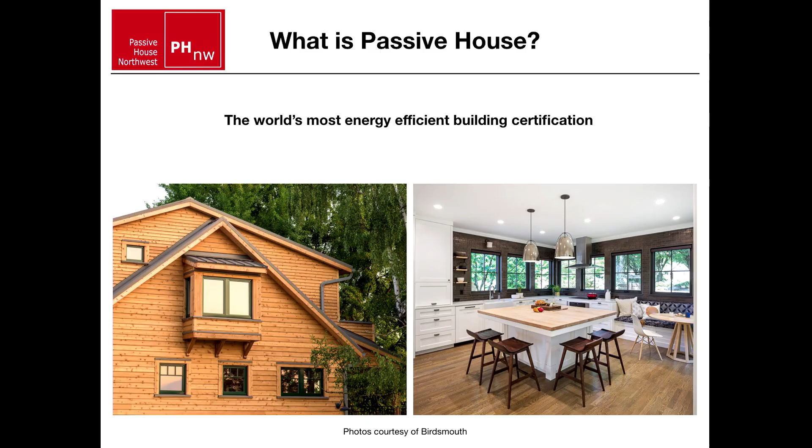And so we are looking at a couple of projects that were completed that we'll be getting into the details during this presentation of some of the things that we're looking for in Passive House. But for now, we're just going to run through a few slides basically describing what Passive House is.

So one of the most key points to bring up about Passive House is that it's performance-based, not prescriptive. So many of you are probably familiar with prescriptive certifications such as LEED, where maybe you need to hit a certain number of points in order to receive your certification. But because Passive House is performance-based, we're actually looking at the performance of the house.

For number one, the project has to be modeled before it is built. One thing I want to mention before I get too far down this road is that the name Passive House is a little bit of a misnomer. Really, you can do any type of building, whether it be commercial, residential, private sector, public sector, anything can fit in the name. But the main point is that it needs to be computer modeled and actually show results in order to be certified.

We've got a little video here for you that does a really nice job of describing what Passive House is: Passive House explained in 90 seconds.

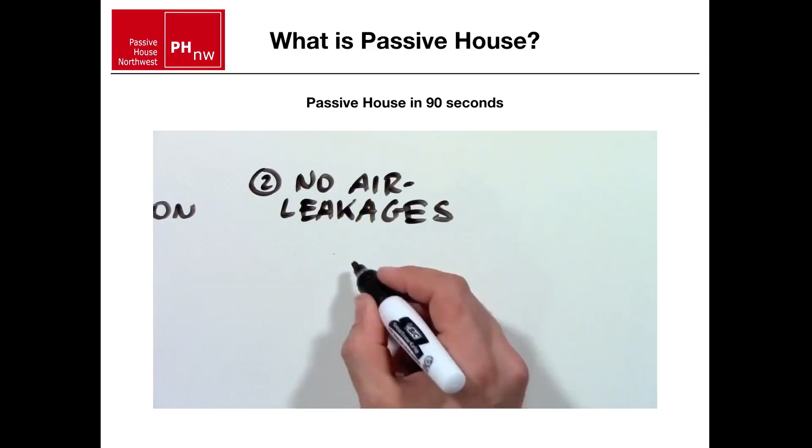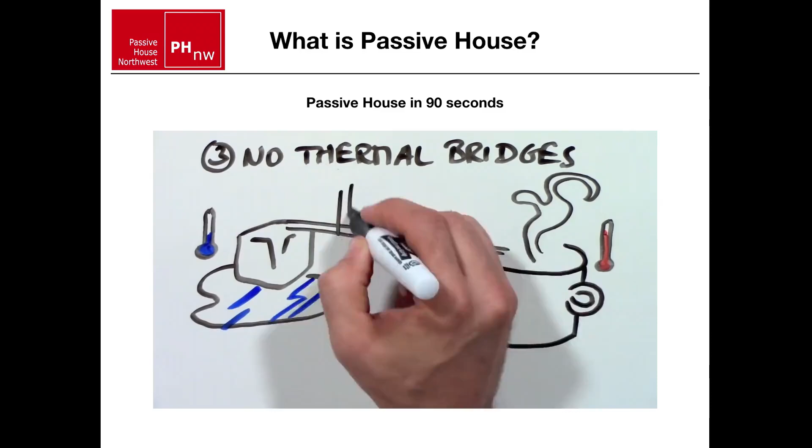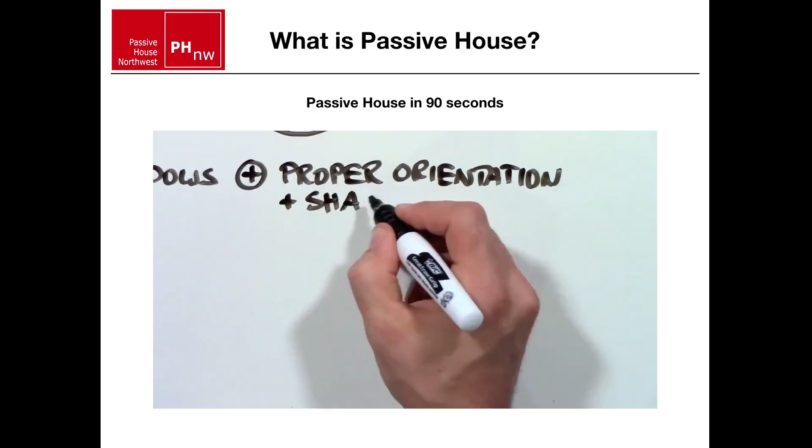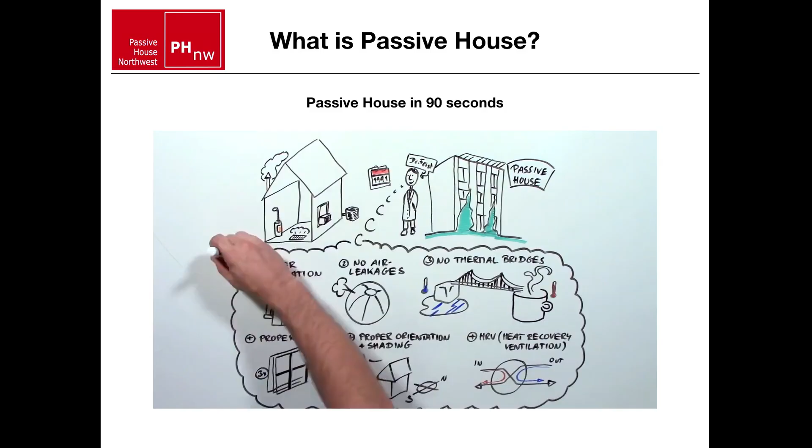Does your house have a heater in the basement or maybe a fireplace? Probably also a central air conditioner or maybe a window unit. Did you ever wonder if it was necessary? In 1991, a physicist in Germany, Dr. Feist, built the first passive house. Here's what he did. One, proper insulation—it's just like wearing the right winter jacket, it also doesn't need a heater. Two, no air leakages—there should be no holes, small or large, to let hot air out of the house. Three, no thermal bridges—a thermal bridge is like a road for heating energy in which warmth can travel right through your walls. As a matter of fact, most of our houses have thermal highways in our walls where heat can easily travel to the outside. Plus, the house needs proper windows, most of the time with triple pane glass. It needs to be oriented properly so the sun can heat it in the winter and shade is provided in the summer. And it uses an HRV, a device that provides the inside with fresh air without letting the heat out. Add all these things up, and it turns out your house doesn't need a heater or air conditioner.

So where does the heat come from? A passive house needs 90% less energy, and that can easily be supplied by your body heat, the sun, your appliances, light bulbs, and even your TV. This saves you a lot of money on your heating bill and helps preserve the environment.

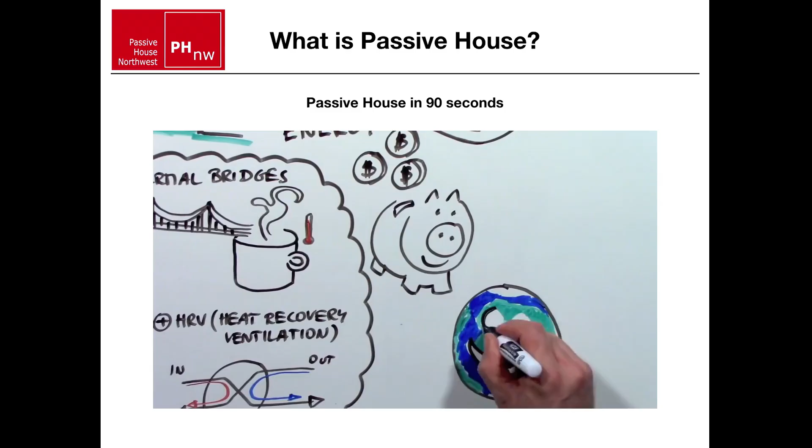Did we make it in 90 seconds? You bet we did. Okay, great.

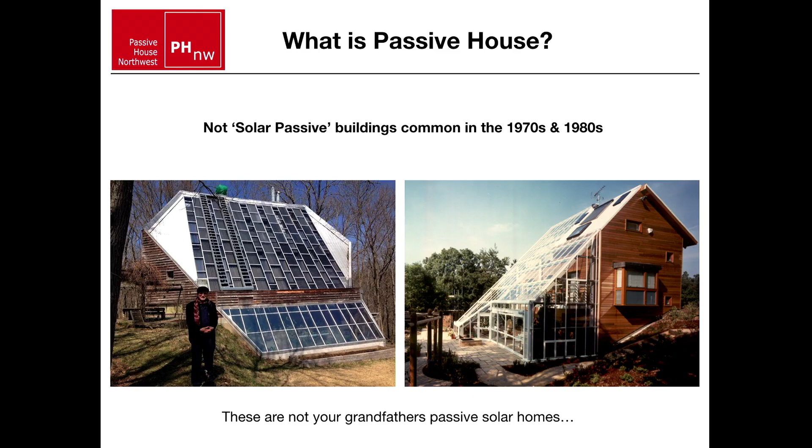Regardless, we can work with any building vernacular that's popular today. We don't need to guess at the performance of a building. Everything is computer modeled ahead of time and energy modeled, and therefore we know, within a good degree of certainty, how the building is going to perform once it's constructed.

And now we're jumping to you. Yeah? I think so. Okay, great. Thank you, Beth, for that. We're just going to be switching off back and forth every so often on this.

But nevertheless, if we're really trying to make a difference in our fight against climate change, buildings are probably the biggest emitter of greenhouse gas emissions. So Passive House is one of the best ways to reduce the amount of greenhouse gas emissions in our buildings through the use of the envelope.

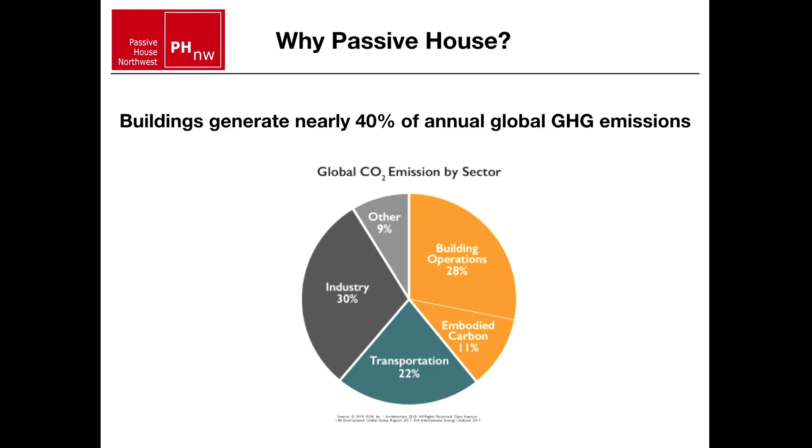So this is kind of a dual-prong approach between addressing the existing built environment—Passive House can be used in retrofits addressing the built environment—but it's also about new building. So I think they're equally important.

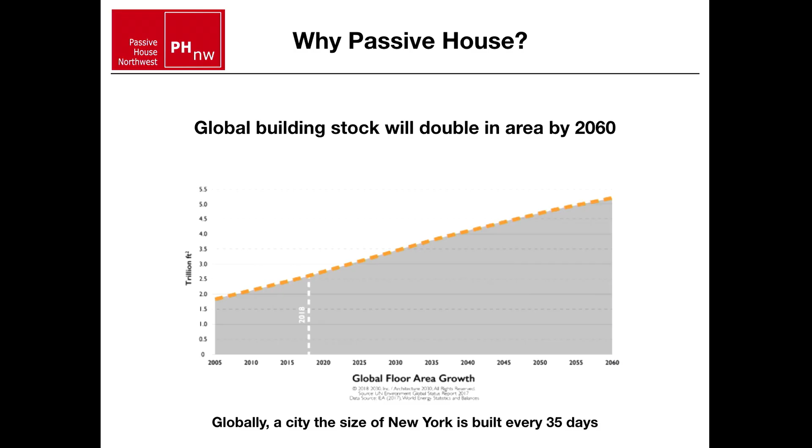As you can see from this graph here, by 2060, if you follow that line over, we're actually going to double. At the bottom there, you can see that remarkable sentence that says a city the size of New York is being built every 35 days on planet Earth. So I think it's imperative that we start making our buildings more efficient, and Passive House is probably the best way to deal with the energy usage in buildings. So this is why we're doing what we're doing and why it's so important.

It might have issues with mold and poor indoor air quality. Passive House not only reduces the amount of energy needed through reductions of the energy usage by the envelope, but it also has all these kind of win-win-win things that come out of it, such as a much higher indoor air quality inside the building.

We'll get into that later on in the presentation. It's much more comfortable, it's not going to be drafty, it's not going to be cold. The back bedroom of the house isn't going to be freezing, whereas the living room has got the ducted forced air heat coming at you and you're too hot there. So not only are we creating buildings that are using less energy, but they're also more comfortable, healthier, last longer, more durable, and also more resilient. So it really is a win-win-win that comes out of this.

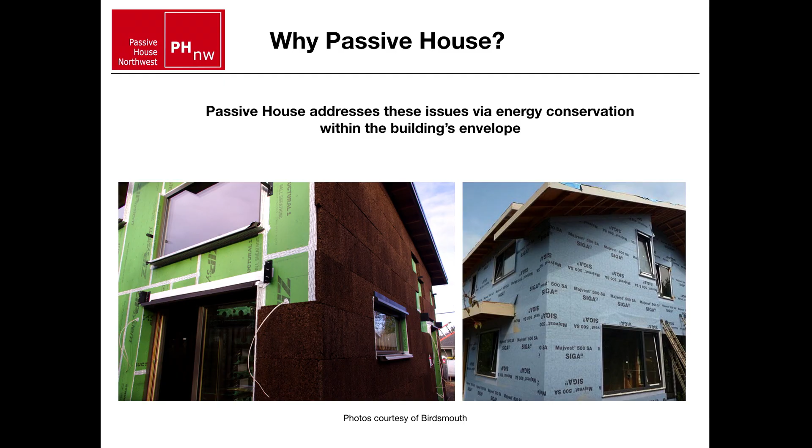The building on the left is something that our company built a few years back, where we used cork insulation on a certified Passive House, and that's kind of the sweater that you're wearing over that building. If you think of the thing on the right as your air barrier being kind of like the parka, that windbreaker that you're wearing, and the one on the left as being kind of a sweater - if you're wearing just a sweater, you get that cold air still hitting you, but if you wear a sweater with a parka over the top of it and you break the wind, suddenly it's really comfortable. Same goes with our buildings, and that's kind of what this is showing.

So I kind of touched on this before - I guess I was getting ahead of myself, but it is a win-win situation. They are more comfortable, they are quiet, which is really an interesting thing. Just a couple days ago I was in a building where we were playing with the windows, and it was a leaf blower outside or something loud - I forget exactly what it was, but you could open and close the window and see how quiet it is, which is really remarkable.

Another interesting story - I was sitting on a panel once a few years back with a woman who was head of Reach Development, and they did the Orchards at Orenco project in Hillsboro, Oregon, which was a Passive House certified multifamily project for people that live, I think it was 80% median family income. Someone in the audience asked what is the most interesting feedback that you get from the residents of this building. I was expecting someone to say it's comfortable and my energy bills are low, which is likely true, but what they said was that they love how quiet it was because it made them feel secure and safe, which is interesting because a lot of these frontline communities are often living next to industry or freeways, noise, all that kind of stuff, and just having that quietness made them feel secure and comfortable.

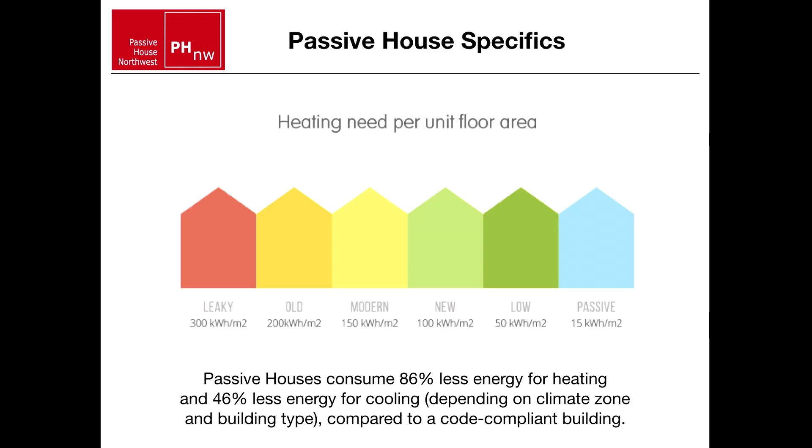Clearly this depends on whether you're in Alaska or in San Diego. In San Diego, where it's perfectly warm all the time, you're going to use much less energy than you would in Fairbanks. But I think this is a good example of how much less energy a passive house uses.

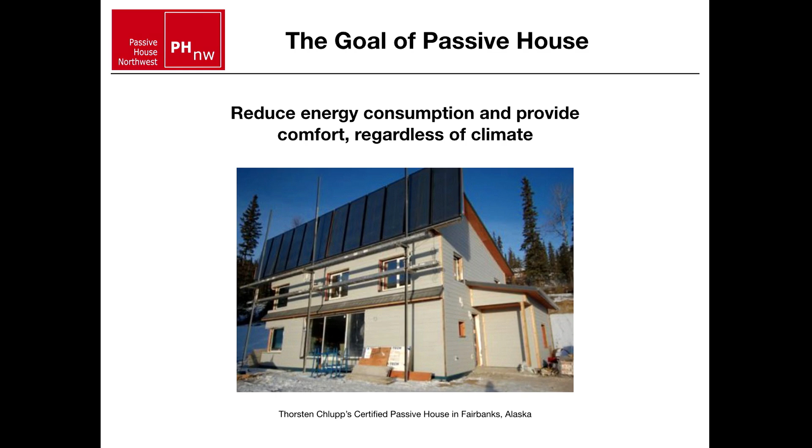You can think about what it's like in the wintertime there, and you just get no solar. You can see the angle of those solar panels, because the sun is really close to the horizon in wintertime, if it even comes up for more than a couple hours. So it can be done anywhere.

Passive house is actually just taking some of these common sense things we used to do and applying it to current building. Oftentimes with passive house you'll see things such as exterior shading, or we'll take that into account in the computer modeling, whether that's the house next door or trees a block away that are shading it.

Buildings used to be site-specific, which passive house is also. When we're doing the computer model with the passive house, it actually locates exactly where you are - latitude, longitude, elevation, trees around you, or if you're getting a lot of sun. So it's very site-specific, taking into account the microclimates of each condition where that house might be built.

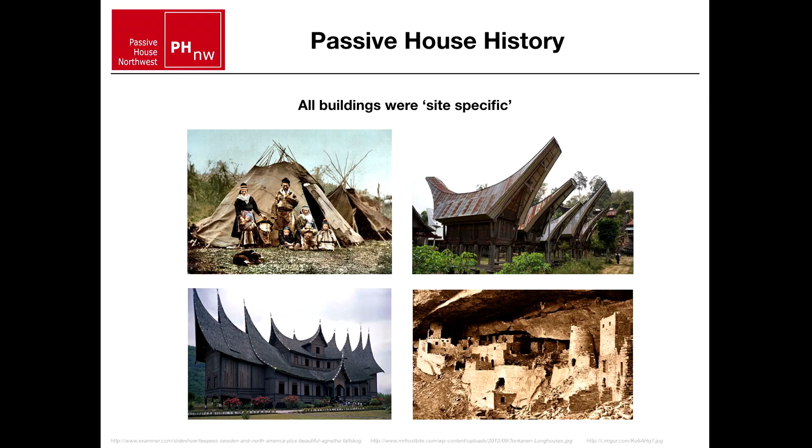If you go way back in time, these vernacular buildings were all site-specific. Whether it was a teepee or something built into the side of a cliff, it was responding to its immediate environment, and that's what passive house is doing also.

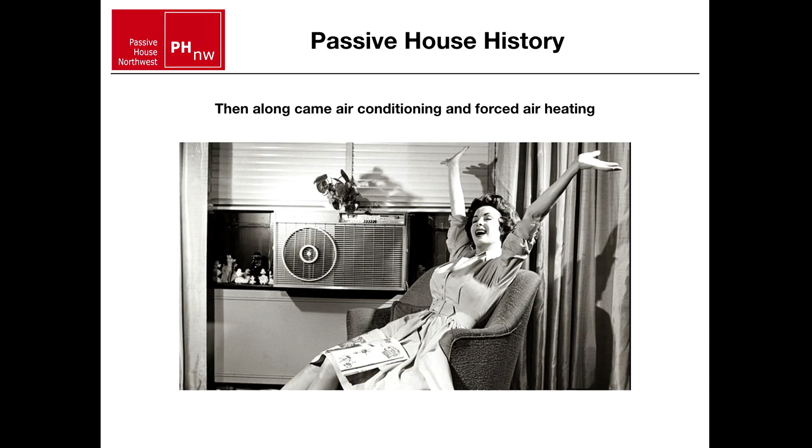Then along comes heating, air conditioning, all these great mechanical systems that allow us to be comfortable pretty much anywhere. You could be in Las Vegas, for instance, and be perfectly comfortable there if you throw enough energy and machines at it. So man, that's nice - I mean, look at this woman, she is stoked. So everyone starts moving that way, and I think that's understandable.

So, why did this happen? Why didn't we just live better lives in the same small, simple homes that we were accustomed to? Because apparently we wanted to live in things that look like this.

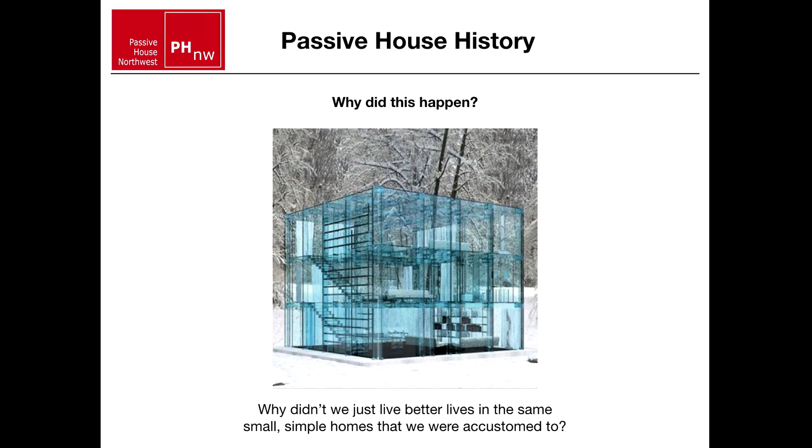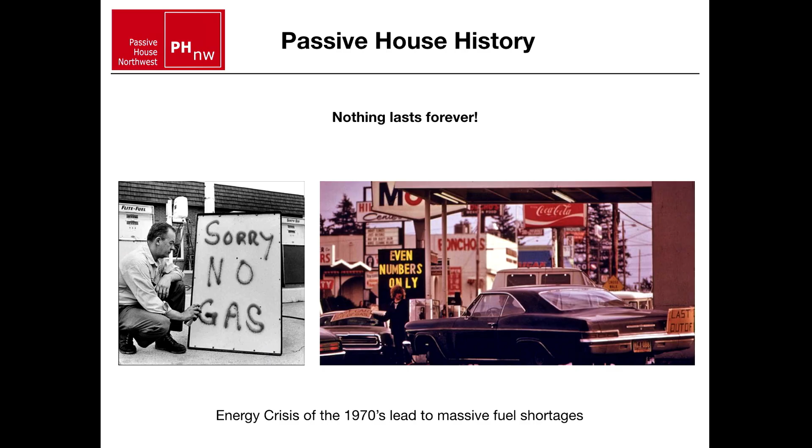So obviously not practical. And then what happened is we kind of hit the energy crisis of the 1970s with the oil embargo, and suddenly gas prices spike, and there's long lines at the gas pump, and people are starting to realize that there's just fuel shortages. And we can't necessarily keep on living in these buildings or building buildings like we used to, with all this added mechanical energy and bump outs, although we're still building like that.

So this kind of sparked the solar passive movement. And to some of the slides Beth was showing earlier, those were the pioneers. They did a lot of great work by putting some of these greenhouses on the south side of their house, trombe walls, thermal mass, all this kind of stuff, trying to figure out ways that we can capture this free energy of the sun. And from there, people realized that these things weren't necessarily comfortable.

It was like living on the moon, right? So it could either be really cold at night because you've just got this glass wall in your house, or it's really hot during the day. It's summertime and it's 3 o'clock and that sun's going through that greenhouse and your whole house is just too hot. So someone started thinking about this, how can we actually make this better?

And so Harold Orr did the first super insulated house. This is continuous thermal insulation. We'll get into that later too, and making it really thick and essentially like a cooler so that you're keeping that energy inside the building. And so this is one of the first houses to do that. And it actually got a blower door 0.8 ACH 50.

We'll explain what that means a little bit later, but this is an extremely airtight building. It had a heat recovery ventilation system. Again, this is providing fresh air, and also keeping that energy inside the house and not just bleeding it to the outside. And it had R44 insulation in the walls and 60 in the roof, which incidentally is kind of about where we're building right now in Portland, Oregon, Seattle, and kind of in the Pacific Northwest to hit Passive House.

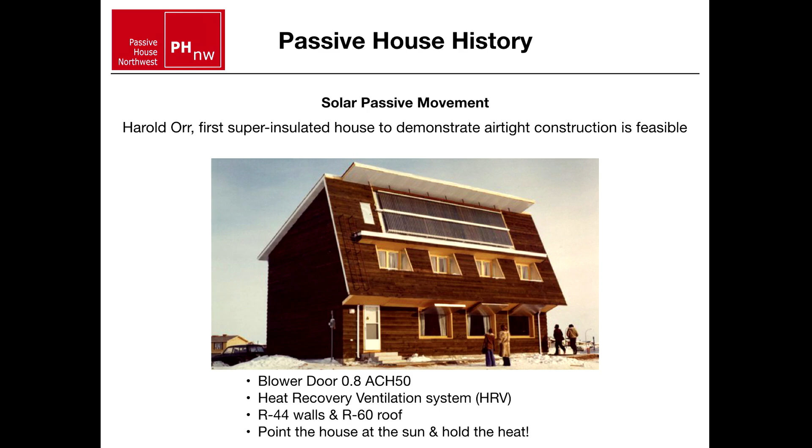Then we get into the Eugene Leger House in 1977. And this, if you look back at this house over here, this is a strange looking animal. Not everybody's going to want to live in something like this, and nor is it necessarily the most aesthetically pleasing building in the world. But the Eugene Leger House kind of took a regular looking 1950s single story ranch and turned it into a passive house. So it's heated only by its own water heater.

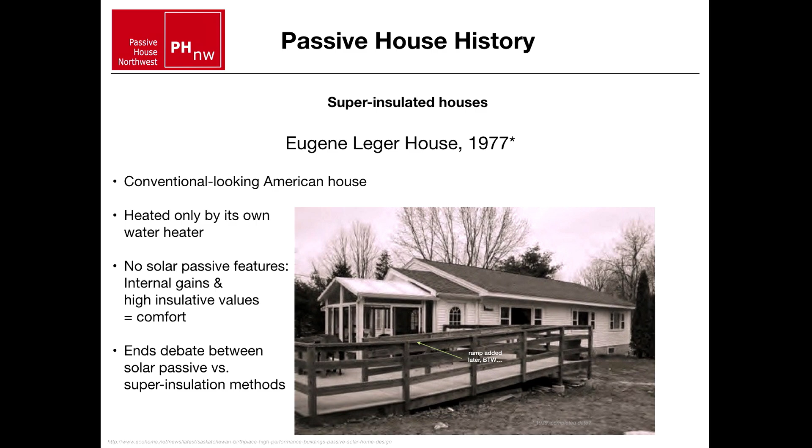And it doesn't have any of the solar passive features, the large greenhouse on the south-facing side. So it just looked like a regular house and proved that we really can make these things super energy efficient without looking like crazy passive solar buildings.

So again, a lot of this is common sense, and Passive House is really just kind of picking up some of the stuff that's already been done by the people that blazed the path before us, and just applying that to today's buildings.

So where are we at here? Almost getting to Beth.

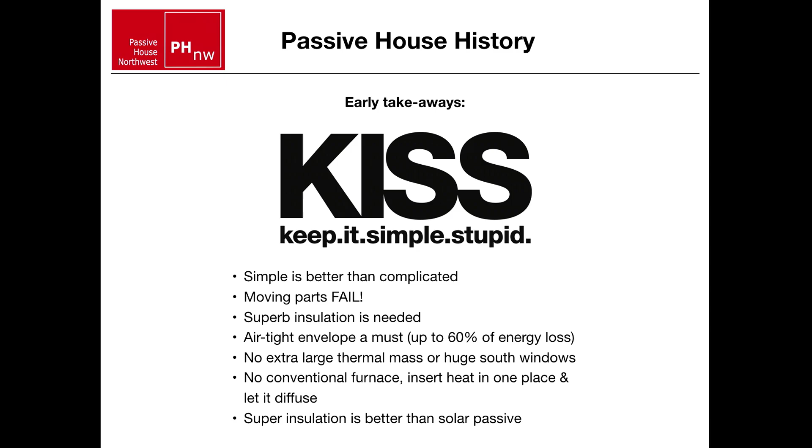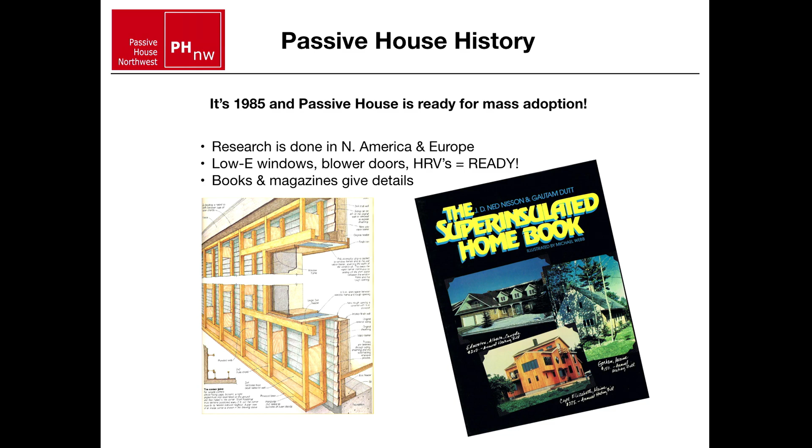And we're just now moving into - looks like we missed one more history slide here - which is showing that even in 1985, they were getting really tuned in. This is a Larson truss in this diagram, showing a little bit more about airtightness, super insulation, and how to achieve it. So we got going in the 1980s, and then kind of lost steam.

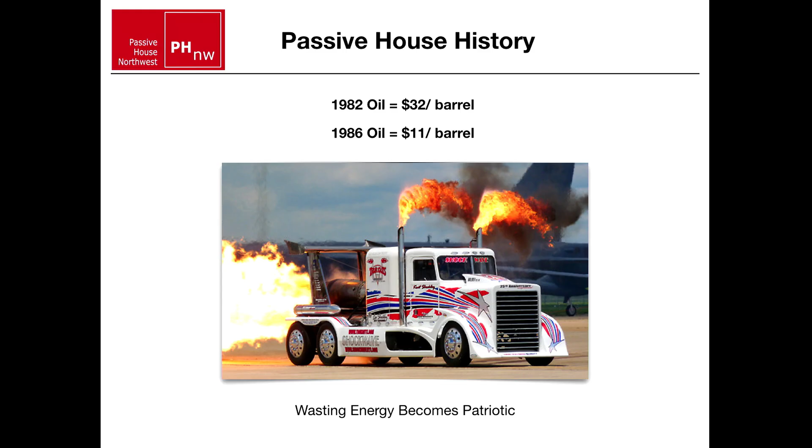So what happened? Why didn't it happen? Because the price of oil plummeted. All of a sudden, people thought that we don't actually need to pay so much attention to efficiency. Things are cheap, hey, let's burn our oil. Sounds great, God bless America. Solar panels got removed from the White House, which I believe they're back up now. But anyway, interesting stuff was happening in the 80s. We really got set back here in the United States.

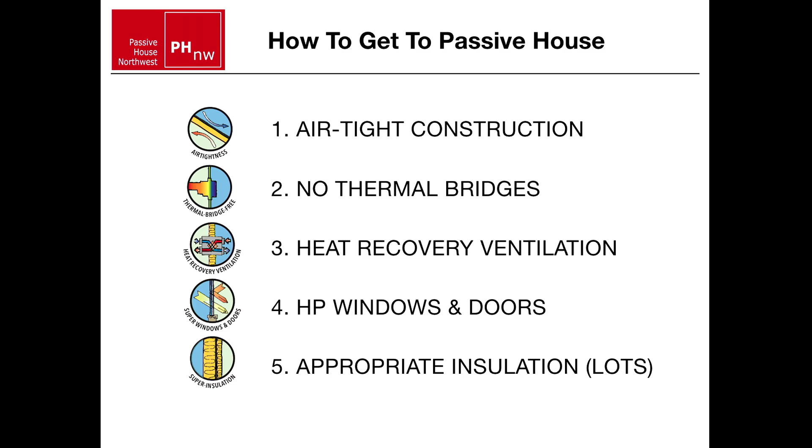So we're going to take a little bit of time here to really get into the nitty-gritty of what sets the foundation of a passive house. These are the general 5 principles that you have to hit in order to achieve passive house: airtight construction, no thermal bridges, heat recovery ventilation, and high performance windows and doors.

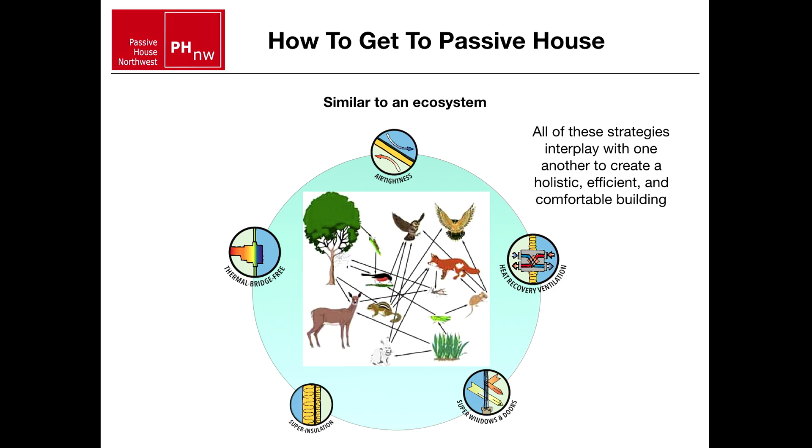And enough insulation to make it work. Again, starting with that idea of the windbreaker and kind of ending with the idea of the warm sweater around a building. We like to think of Passive House as an ecosystem, that everything has to interplay, everything has to coalesce and come together to really create a robust building envelope and a robust system that's going to achieve the energy efficiency goals.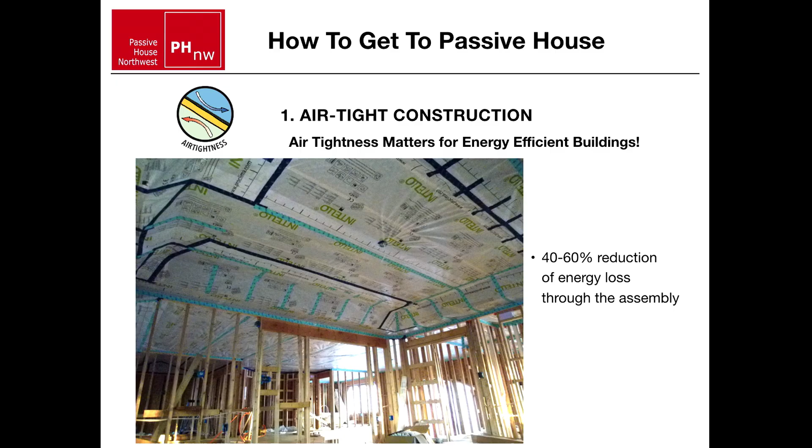We often have this argument: what's more important here in our zone in Portland, Oregon, a lot of insulation or air tightness? A lot of us building geeks come to the determination that air tightness is almost more crucial than insulation in our region because we see such a reduction in energy loss when you just seal up your building. And of course, we're going to get to ventilation in a minute here because we're not making a house that doesn't breathe.

We are really focused on making long-term durability, and water is really what creates mold issues. Water is what destroys durability. So one of the reasons why we focus so much on air tightness is to create a durable building.

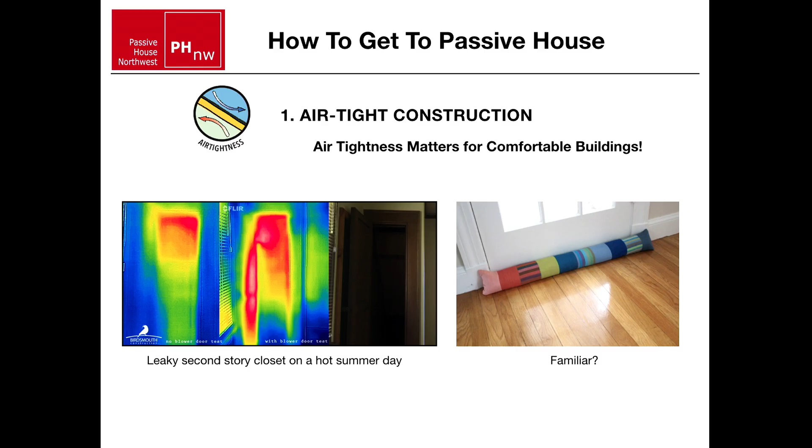So all of a sudden we're sucking a bunch of air through the house. You can see how much air leakage is happening within that closet, demonstrated by the red. It was a hot day on a second story where that photo was taken. And we all know that drafts feel uncomfortable. So producing comfort is sort of a byproduct, but it's really one of the selling points of Passive House, letting our clients know that you're going to have a much more comfortable building.

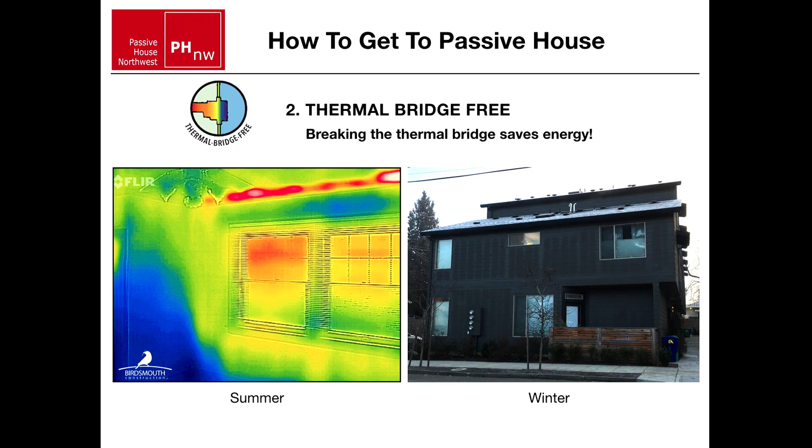It's almost like having a radiator in your home, in those rooms. So that's what we'd like to avoid. The photo on the right, this was classic. Josh was just driving in his neighborhood and snapped this photo of a frosty morning. You can see every single stud in that house. So one of the main things we need to focus on is creating a thermal break between exterior and interior temperatures to help lock in the energy we're putting into our houses.

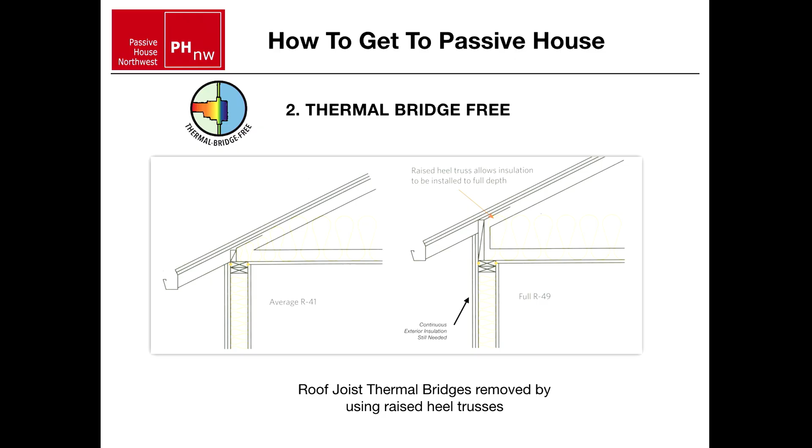Here's a great little slide, such a simple tool. Creating a raised heel truss will eliminate this situation with the radiator at the top of your ceiling, because the image on the right shows that it gives you a little bit more insulation with just a simple technique of raising up your roof where it meets the wall. Again, with thermal bridging, we're always focused on finding the path of heat transfer and eliminating that path, all those pathways.

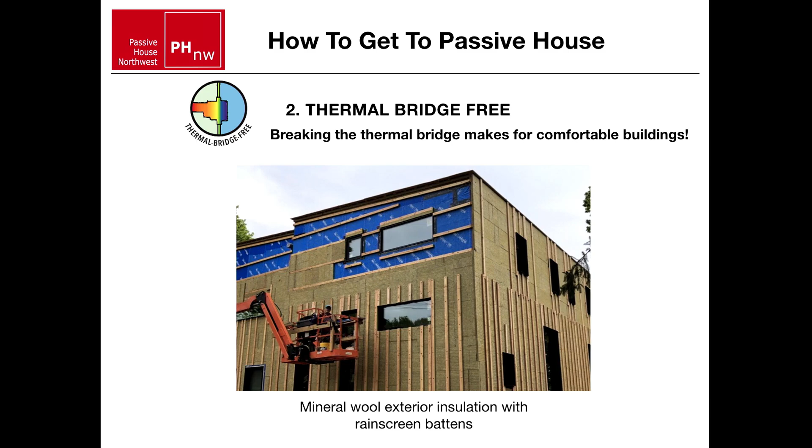And the exterior, as Josh was talking about earlier, the exterior insulation really provides that sweater. Even though wood is not the worst transfer of energy, it's got about R1 per inch, especially when you've got a steel-framed building. When you reduce the energy use of a building as much as we are using in the Passive House standard, you really need to start paying attention to all the places where you're transferring energy in a building, including through your stud wall. So typically you see a lot of exterior insulation happening depending on the climate within a Passive House building.

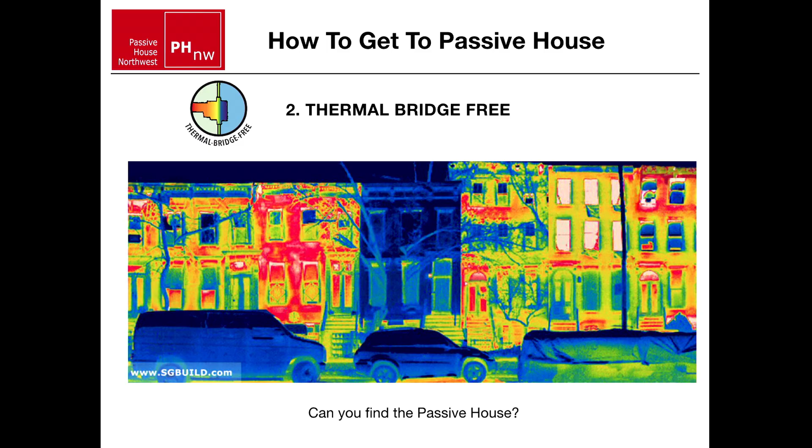I love this photo. This is a brownstone in Brooklyn. The house in the middle, they retrofitted up to a Passive House standard, and you can see this is a winter day. Check it out—the brownstone directly to the left of the one in the middle is just leaking out all of its heat. You can see by the one that was retrofitted to the Passive House standard just how much energy they are keeping inside of their building as they heat it. It's a great shot—basically the same as the car that's off.

It's amazing. And I'm going to pass this back over to Josh to talk about the third principle of heat recovery ventilation. Okay, thanks, Beth.

So we're going to talk about some really exciting stuff here, heat recovery ventilation. This is super important because one of the items often heard about airtight buildings is how a building needs to breathe, and that is untrue. People need to breathe, buildings don't need to breathe. So you are creating an airtight layer, but that layer is keeping all that energy in, though oftentimes it is vapor permeable. I think when people say breathe, they're thinking about that vapor—trying to avoid the gerbil in a Ziploc bag situation, not to make a morbid reference. We want that moisture to be able to transfer through that assembly, or at least escape one way or another, and the HRV can help with that.

People need to breathe, so we need to bring fresh air into these buildings for the people living in them. One way to do that would be to simply cut a hole in the wall—it would let air in, and then we'd be able to breathe. The obvious problem is that as soon as you cut a hole in the wall, all the energy you were trying to preserve is just going to escape right out. So we need to find a way to bring air in for people to breathe while still keeping the heat inside the building. That's what the HRV is essentially doing here.

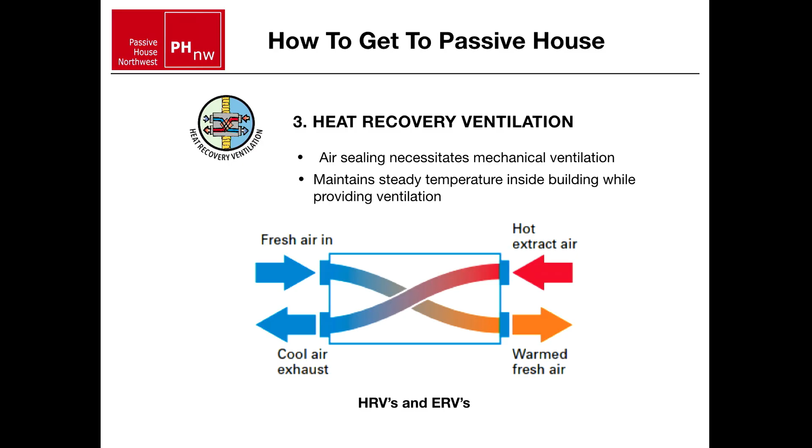So what we're doing is, let's say it's a day like today where it's about 36 degrees outside. Inside our buildings, we're shooting for about 68 to 70 degrees, and we want to bring that cold air in. So as this cold air is coming in from the outside, there's some warm air on the inside that's moving out, and that warm air passes alongside the incoming cold air.

It doesn't mix, it just passes alongside. So as this cold air is coming in, it gets warmed up by the warm exiting air. By the time that exiting air leaves, it's cooled off, and by the time this incoming air gets into the building, it is warmed up. A really nice HRV can capture almost 90, 93% in some cases of the energy from the interior of the building into that incoming stream of air. So that way we can have fresh air, and also stay warm inside of our buildings.

So we are controlling where we're bringing that air into the house. Similar to our bodies, we don't just bring air in willy-nilly through different parts of our bodies. We have a respiratory system dedicated to ventilating our bodies, just like what we're doing here with the house. We have a dedicated spot where we are managing that incoming air into the house, not just letting it leak in and escape from random spots through a defective building envelope or just a lousy build. So that's essentially what an HRV is doing.

So what they also do as that air is coming in and out too, is it's being run through a filter. Oftentimes these filters can be really aggressive. They can be HEPA filters. They get up to MERV 15 in some cases. And so those filters can take out particles of dust that are actually smaller than smoke dust.

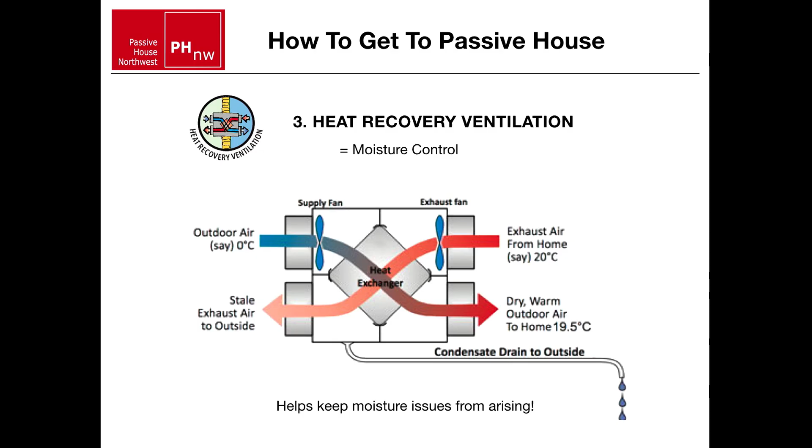So that's another thing that your HRV or ERV is doing. I think we get into the difference between HRV and ERV in a few slides here. If not, I'll come back to it.

Another important thing this unit is doing is balancing the pressure between the inside of the building and the outside of the building. So if you have in your building a hood vent, a bath fan, a clothes dryer, those things will exhaust a ton of air, 400 to 600 CFM. Some hood vents will suck out 600, 800, or more CFM of air. Bath fans, 80, 110, sometimes 150 CFM if you've got multiple bath fans.

If you're turning all these things on at once, what you're essentially doing is sucking all the air out of the house and creating a negative pressure inside that building. And when you do that, air is going to make itself up, right? Everything wants to move from areas of high concentration to low. So air is going to want to move inside that building, and where's it going to come from?

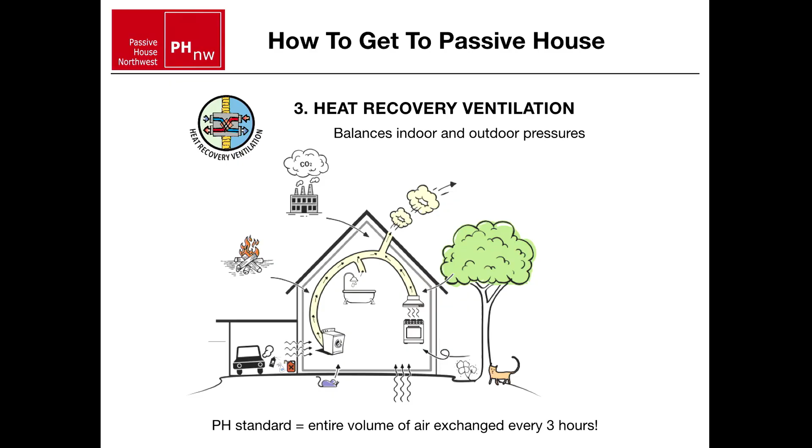So what the HRV does is it's always exhausting the exact same amount of air as it's bringing into the house, so you never have any pressure imbalances in your house. When you have an equal pressure from the inside and outside of the house, none of these pollutants or nasty things are going to want to infiltrate into your house.

Alternatively, you could have a pressurized house too. You could have, say, a really windy day, and when wind is blowing along the outside of a house, it creates a negative pressure on the inside of the house. And what that can do is take all the heat you've created in your house and just blow it outside, while infiltrating cold air into your house.

So again, by balancing those pressures with your HRV or ERV, you're breaking that ability for air to want to travel across that wall. They're really making your house not only filter air, but also not allow all these nasty things into the house in the first place. And if you have a really great air barrier, you have fewer spots for that air to get in. So we're making it difficult for those nasty things to get in or out, and balancing the pressure, making it very difficult for any sort of transfer to happen, and creating a really nice indoor environment of high indoor air quality, managing the humidity, and keeping it extremely comfortable.

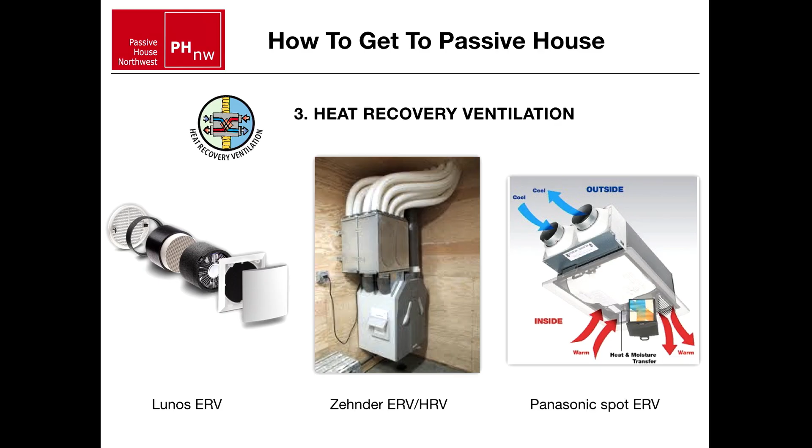I know there's a lot of confusion about that. Essentially, the difference is the HRV, the heat recovery ventilator, is taking all that moisture and just exiting it out the building and dropping it out through the condensate line. So it tends to lead towards drying of a house. Whereas an ERV returns some of the moisture back into the building as that's going out. So if you're in a place with air conditioning, where you're in, say, Miami or something like that, we have a lot of air conditioning and you're really getting really dry inside your house, you might want to use an ERV and return some of that moisture back into your house so that you're not over drying your house and getting cracked lips and scratchy skin and all the stuff that comes with being dry, throat in the morning.

Typically nowadays, our company is using ERVs, even here in Portland, although HRVs can work. I have found some scenarios where the HRV is drying the house out a little more than we'd like, so we've switched to ERVs. That said, the Zehnder in the middle, you can actually replace the core from an HRV to an ERV, which is really kind of nice. If you find that you've installed an HRV - this happened on a house we built a couple years ago - running a little bit dry, well, we could just simply take out that core and put in an ERV core and boom, it really helps solve that problem. So that's the main difference between the HRV and the ERV. The ERV lets a little bit of the moisture back into the house to manage your relative humidity so you're not getting too dry.

Now we're going to move on to windows and doors. Typically in a passive house, we're using triple pane windows. It's not always necessarily the case. If you're in a climate zone that doesn't require it, like again San Diego, you could probably build a passive house fairly easily with just double pane windows. They have to be really robust and have good spacers and be a nice quality window. But more often than not, and especially here in the Pacific Northwest, because that's really the Passive House Northwest Conference where we're focusing on, it is a triple pane window.

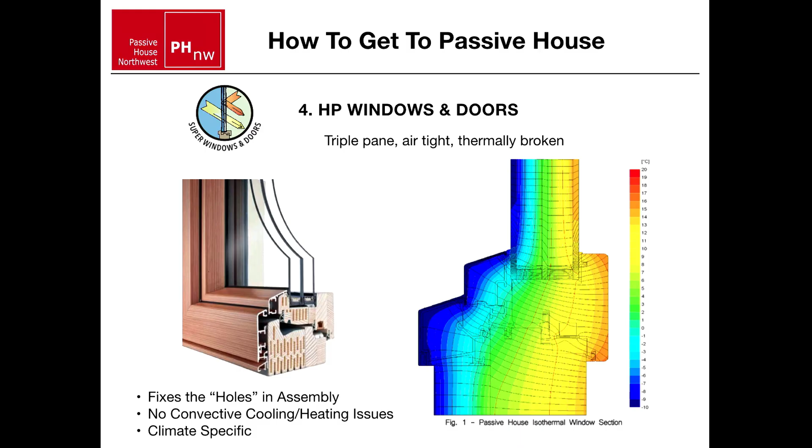And as you can see from this slide, as you're looking across the thermal image of the window on the right, you can see how this is a cold day where it's cold on the outside, and slowly, gradually warmer on the inside. You're not letting any of that blue or green get to the interior where it might cause condensation or problems. And it's also making it more comfortable - you're not getting really cold windows that are radiating cold at you. You're not feeling that. You're actually breaking that, and you can stand next to the window and not lose all your heat to the universe through the window. Great example of how those windows work there.

So here's a quick thing that we did a few years back, just an example of how important windows and doors are. What we've done here is taken an imaginary wall, 25 feet long and 8 foot tall, with 2 windows and a door. It's built with 2x6s with cellulose insulation. It's regular framing, not advanced framing, so there's thermal bridging happening through those studs.

So if we take that R21 cavity insulation and equal it out with the thermal losses through the bridges, and then take into account our windows, what I've got here is some 0.35 U-value windows, which is code minimum at least in Oregon currently. You put that into your wall, and it takes that R21 insulation and effectively makes it about an R8.2. We're saying 20% of this wall is windows and doors, so that's our effective R value in this example.

So the question is, what if we want to use passive house windows and doors? This is an example of a wall where we took that same wall but put in a passive house window and door with a U value of 0.11. We said, well, what's the effective R value of this wall? So we did all the calculations, and it turns out this wall with passive house windows and doors gives us an effective R value of 13.5.

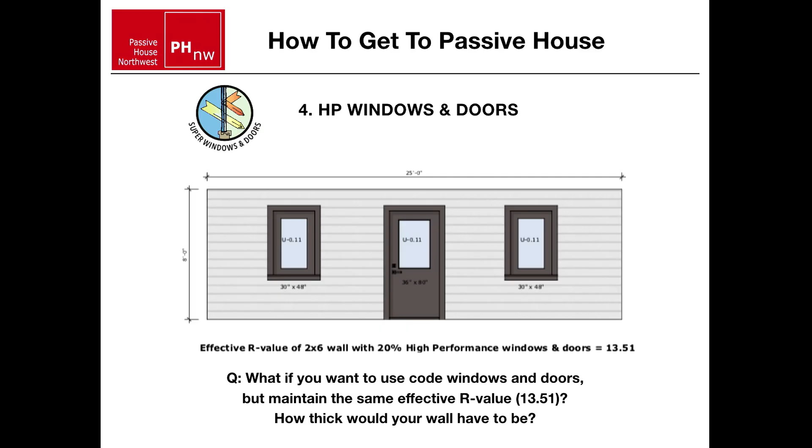Okay, so you went from an 8 to a 13.5, what does that mean? What if you want to use code level windows and doors in the same wall but keep that same R value of 13.5 - how thick would your wall have to be to get to that R13 with code level windows and doors? The answer is about 86 inches thick, which happens to be exactly as thick as a Hummer H2.

I have to admit I used a little backwards math here to make it exactly 86 inches wide so it could fit a Hummer H2 in there. But the point is, what do you want to spend your money on? 86-inch thick studs and that much insulation? Or do you want to invest in a higher quality window and door that also doesn't leak and give radiative losses? I think this is just a really great example.

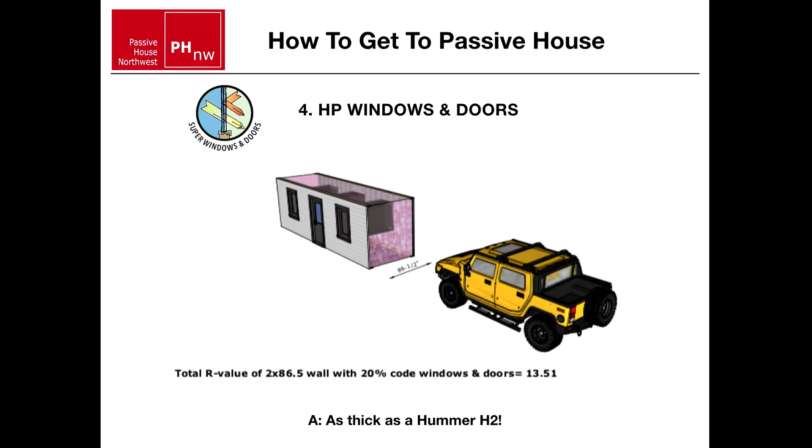Then we took a next step. We asked, what if we took code level windows and doors - how thick would a wall have to be to reach R21? Because that's your normal value of the insulation, R21. So, let's try to get to R21 with code level windows and doors - how thick does that wall have to be? Infinity. It doesn't ever get thick enough to reach R21. So it really shows, I think, a good graphic of how important windows and doors are to a building and how much heat loss happens through there.

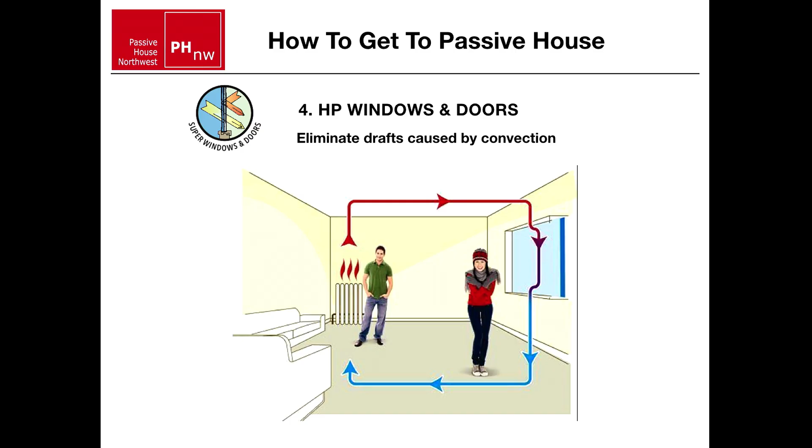What's happening here is because that glass is cold with a regular window in a house, your air is moving along, it hits that cold spot, it cools off. As air cools off, it starts dropping down - colder air is more dense than warmer air, so it starts falling. It travels along the floor, warms up, starts moving up again, moves around, hits the cold window, and you're creating loops of air in your house - these are drafts. I've been in lots of homes with single pane glass where there's not a lot of air drafting through it, but you're feeling a draft - what's happening is just that air is cooling off, getting more dense and falling down, creating drafts.

When you have a passive house window, you're breaking that thermal bridge, and you're within 7 degrees of anywhere else in the house. You're not getting that air to fall down and create drafts. So not only are you saving drafts from a really tight window, because these things often have 7-point locking hardware with 3 gaskets that lock down into itself, kind of like a submarine door, you're stopping leakage coming through, stopping the cold bridge, and stopping drafts. It's really short-circuiting all these problems.

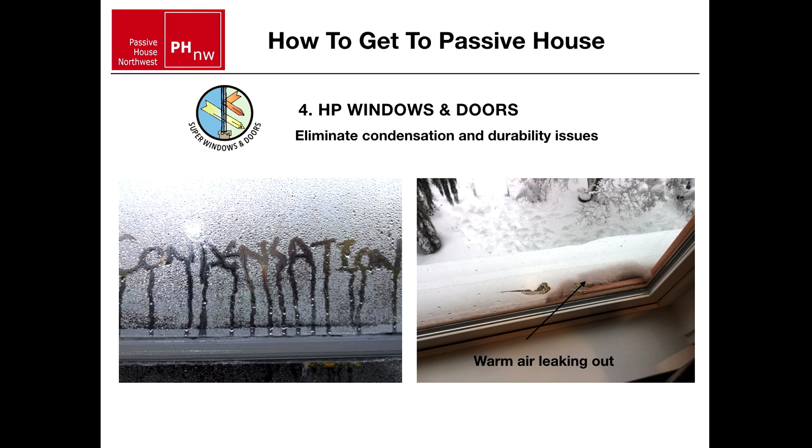This morning I was riding my bike in and saw some great examples. It was a frosty morning - some roofs were all frosty and cold, and on others you could see a stripe where it had melted because of so much heat loss coming through there. In this case, it snowed, and I obviously have a leak happening on the right side, causing the snow to melt out there. You don't normally see that on a typical day, but add some snow to the mix and suddenly it's like, oh yeah, I have some really lousy windows.

So I think it's time to move over to - nope, I'm still moving here, sure. All right, cool, I'm gonna keep going.

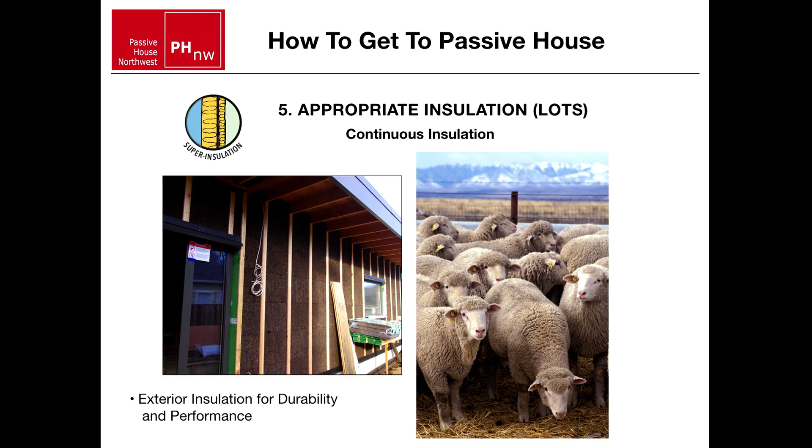So we're going to talk about insulation and continuous insulation. On the picture on the left, here's a house we showed before with continuous exterior cork insulation going on. We also show some sheep here because there's a product, Havelock Wool, that is a sheep's wool insulation. If you want to really lower embodied carbon and have something resilient, that's an option. And kind of fun.

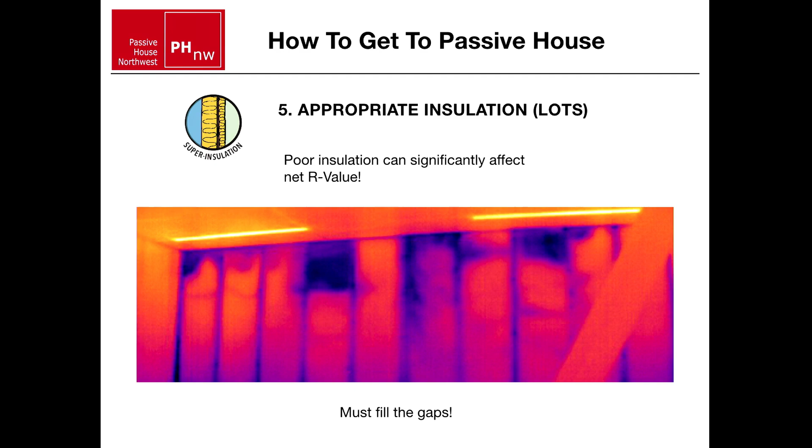Generally speaking, we don't like to see batt insulation - it's rarely installed correctly like you'd see in a lab where they do the testing. I know at our firm, and I believe at Beth's firm too, we've just stopped using fiberglass batts altogether, because they're just proving not to really work as advertised. Whereas if you use blown-in insulation - we'll show a video of that later that Scott at Hinge did, actually it's the next slide - that's really doing great work making sure we're filling in all these voids and not allowing any heat loss through missed insulation.

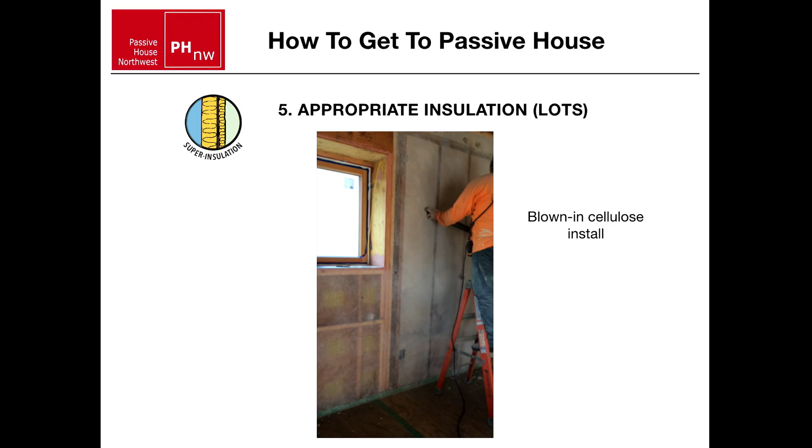This is a little video of some cellulose insulation being installed, filling up the top and getting all those spots in there. That's how the cellulose is installed, and you're really not leaving any gaps - it gets behind all the wires and junction boxes. Looks like there's an outlet on the bottom left there. It really fills in things well, and this is just a great way to insulate a house properly.

Hopefully everyone saw that video. Yeah, okay, cool.

So we want to have insulation over the top of the buildings, under the bottoms of the buildings, and the side of the buildings. We really want it around the whole thing. We want to break even below the building, and we have a slide of that coming up, to decouple it from the ground, because you can lose energy to the ground too.

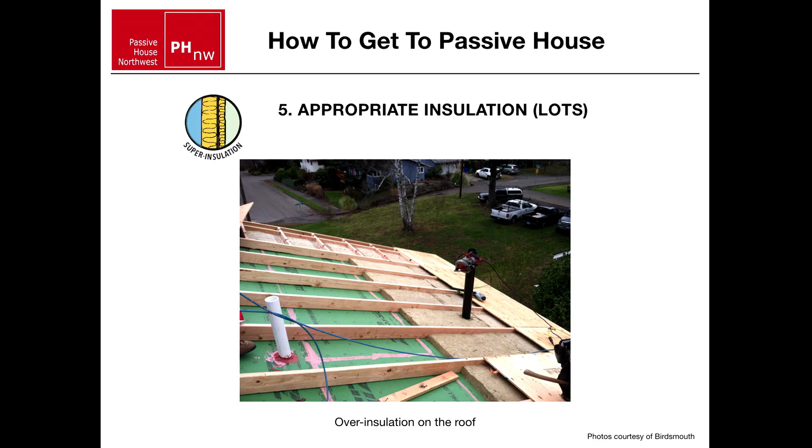So insulating over the tops of the buildings, and there's lots of different ways to go about doing this. This is just one example of how you would do it on the roof in a vaulted assembly. I'm happy to take questions, or if anyone will send an email to myself or Beth or Passive House Northwest about assemblies and stuff like that. We can really get into the weeds, but this is just one example right here.

So just like with an air barrier, you want to be able to, if you had it in plan on a piece of paper, put down a pen and be able to draw all the way around the house without ever lifting your pen off the page, right? Do the same thing with your air barrier as you would with your insulation. Make sure that's all continuous. And that would happen very early on in the design stage, which is something I don't know if we have talked about yet or we will talk about, but making sure that you get into this very early on in the design stage.

And also with insulation, I touched on this a little bit. We want to make sure that if we've got a warm inside of a building and a cold exterior, just like we do today, that warm, moist air, you can see that kind of blue vapor going through there. It just travels right through the drywall, right through that insulation. They're very permeable. And then it hits the back side of that sheathing, which is the least permeable part of this particular insulation. And it goes from like a 6-lane highway down to like 1. And suddenly it's going to start backing up. And if that moisture is backing up at that particular part of the wall, and if it's cold because it's a cold day outside, it can condense, right?

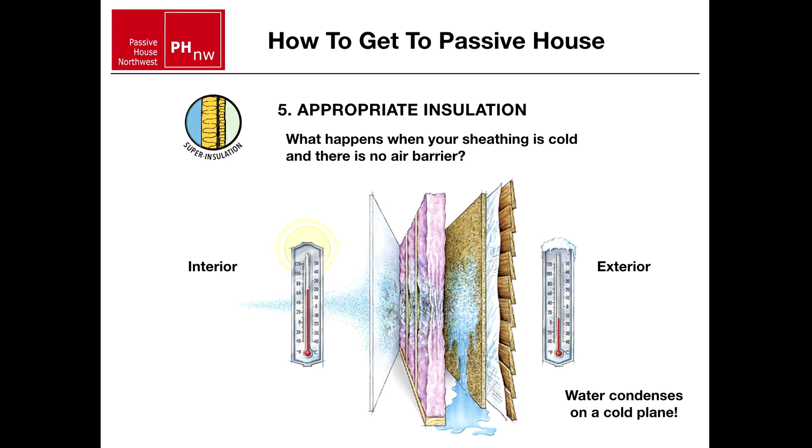So how do you deal with that, right? One thing that should be pointed out with a passive house compared to a typical house is that passive houses use a fraction of the energy of a typical code level house. So the example I give often is that my house, I live in a 1925 Craftsman, and I've got a 140,000 BTU gas furnace in there. That's pretty typical for a house of my size and of its vintage. But the last passive house that we built only needed 4,300 BTU, so 140,000 versus 4,300. That's a remarkable decrease in the amount of energy required to heat and cool this house.

But what happens with that, my house is leaky and old, and we're still taking showers. We have house plants. We're cooking pasta. We're creating all this moisture. How come this isn't happening on my house? Why isn't my house rotted out? And the answer is that I'm just putting so much energy into the house that it's acting like a kiln. And that huge 140,000 BTUs of energy is drying out any of that condensing moisture on the backside of my sheathing or skip sheathing, whatever is in my house, and keeping it dry, and therefore keeping all these 100-year-old, 125-year-old or older houses from just rotting themselves down.

As soon as you lower your energy usage in the houses, which is the whole goal of what we need to do, it magnifies these issues. You don't have that ability to just dry things out through sheer force. So we need to be extra careful, and this is why we computer model these houses, and why they're third-party verified during construction to make sure they're built exactly per plan, so you don't get issues happening because you don't have that force of power to dry things out.

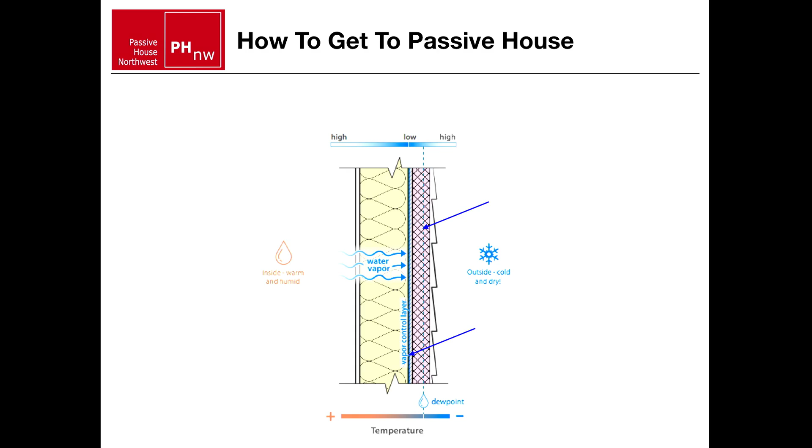As long as we keep that dew point, the point where water will condense, outside of where our vapor control layer is, that's the least permeable spot. In other words, we're keeping that least permeable spot warm, so we're not going to get condensation. This is really important. This exterior insulation keeps your sheathing warm and keeps that warm, moist air from condensing there and creating all sorts of problems.

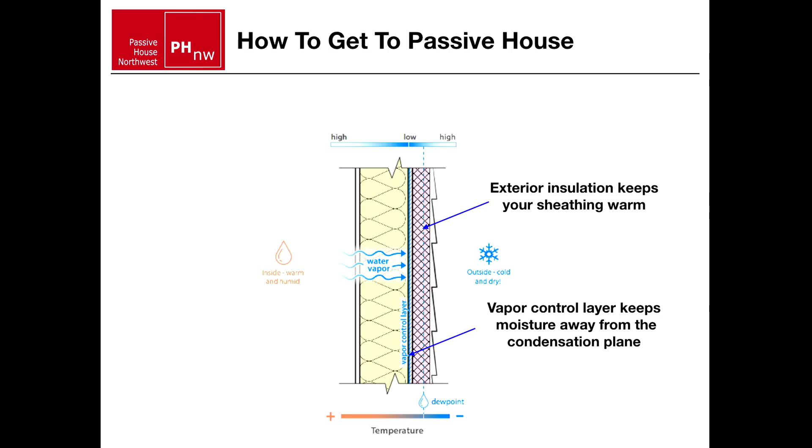That way we can have a wall in a house that uses very low amounts of energy, again that 4,300 compared to the 140,000, without running into these issues. We're using exterior insulation to keep that vapor control layer, the least permeable part of the wall assembly, warm. So really important thing about insulation: it's not only keeping us warm, but it's also keeping your building durable and healthy too.

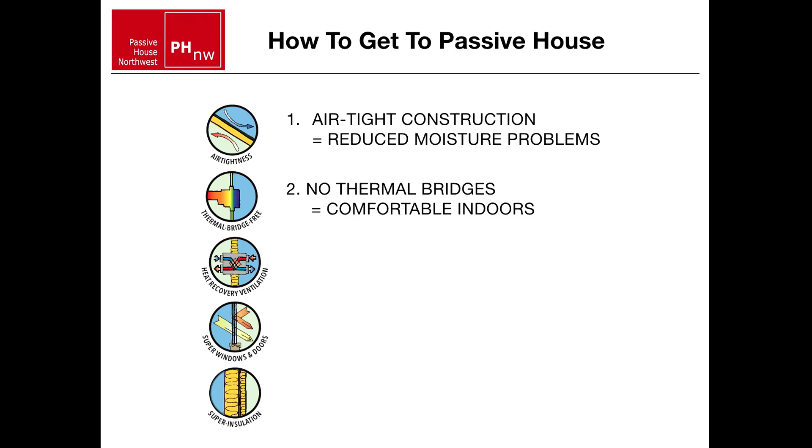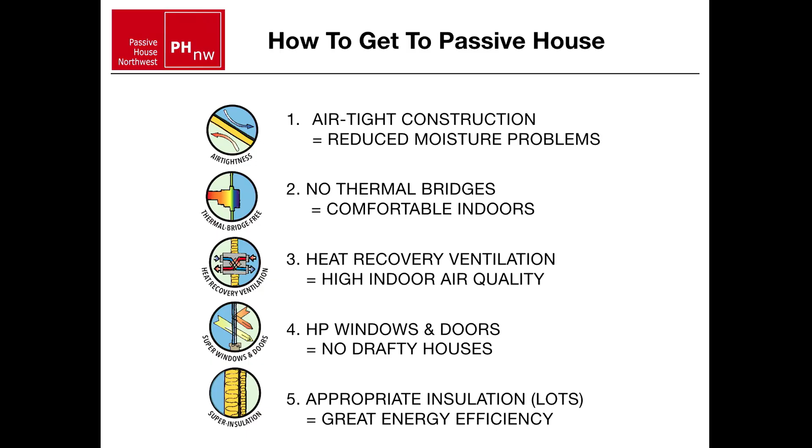So we talked about all these things, let me run through them. We talked about airtight construction, which reduces moisture problems, among many other things. Getting rid of thermal bridges so we're not letting energy escape. Heat recovery ventilation, balancing pressures, allowing fresh air in, filtering the air, indoor air quality. Using high performance windows and doors, back to that graphic with the Hummer, how important it is to use really good quality windows and doors in these buildings so they're not drafty. And using a lot of insulation, which leads to good energy efficiency and keeps buildings durable, safe, and healthy. So that's how one gets to Passive House, an overview of the technology within the envelope of these buildings.

With that, I'm going to hand it off to Beth. Great, thanks. Yep, we're going to speed things up so we can keep things on track. But basically, we've given you the essence of the main components of how to get to Passive House.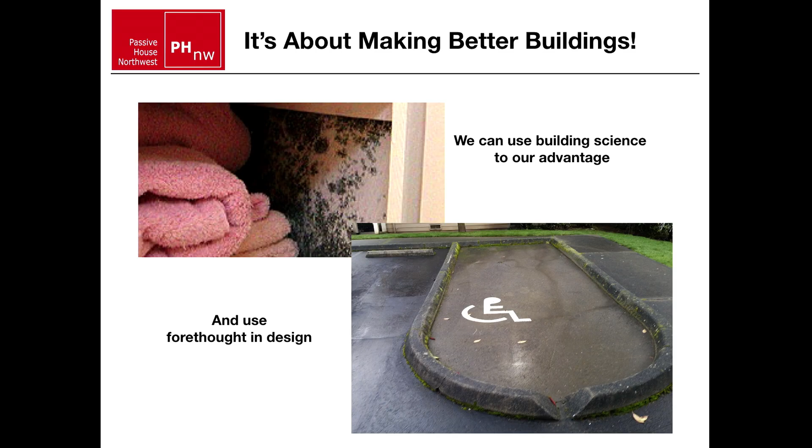Let's use building science to our advantage. This is a great example of what happens when you don't have any vapor control layer, you might have seen this before: mold. Importantly, we really need to design for smart buildings, smart assemblies, smart construction.

You can do really fantastic design. You can do modern, traditional, all types of vernaculars. We're at the bleeding edge sometimes, as we say. We're constantly learning from our mistakes, hopefully not making those mistakes twice. Again, it takes a lot of planning to make sure we get these things right.

This is one of my favorite slides of all time. As Josh mentioned, we do a lot of site-specific work before we even begin construction. We're looking at latitude, longitude, elevation. We're looking at the various trees or building shading on any given site, which really influences and determines how we're going to place our glazing, for example, on a building, and how much insulation we might need.

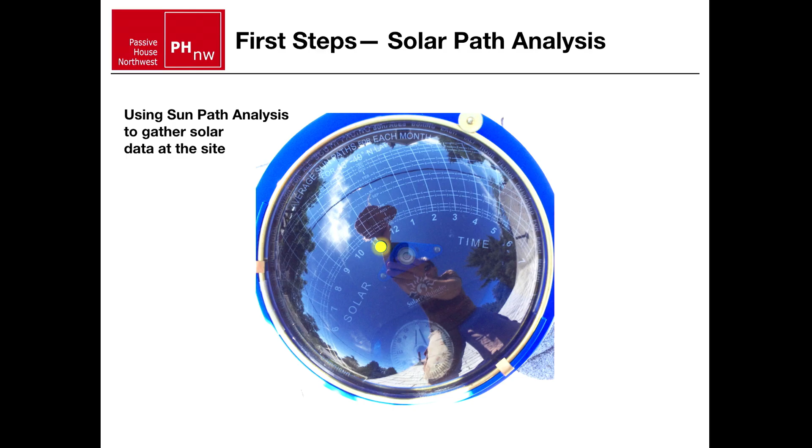We're also making sure that we have glazing in appropriate areas. We want to make sure we're not overheating, and that we're capturing winter sun to help heat the building in a northern climate. This is an image of a solar pathfinder, a tool we use that determines where the sun angle is going to be at any given day and point in the year. Of course, it's going to be very different in Fairbanks than it would be down in San Diego.

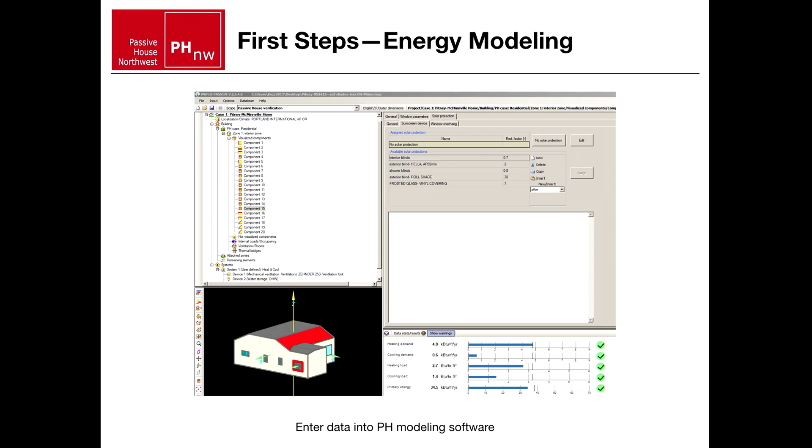Energy modeling - there's a couple different programs out there. Some of you who are already geeked out into designing these things know about them, but they're fairly user-friendly. This one is WUFI, it's open source. There's a lot more that could be said about it - entire day-long presentations we could get into on WUFI.

And then what happens? We build them, we test them, we verify them, and we learn from our mistakes. This is a great example - you can see that these window and door bucks are extending quite a bit beyond the exterior plane of the sheathing, to accommodate the exterior insulation that'll be going on. They've done some pre-planning - you can see the pink around the frames, showing some air sealing they're anticipating by the time they get to their exterior insulation.

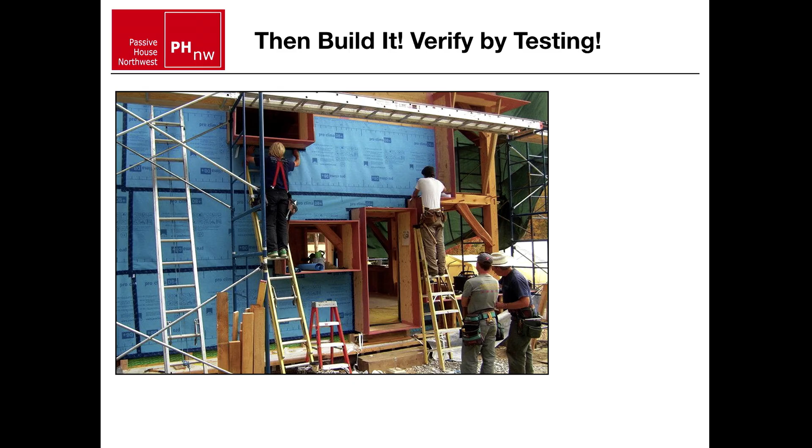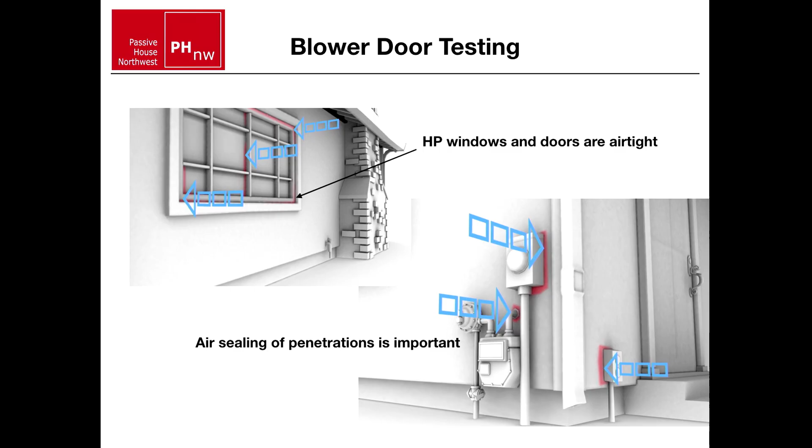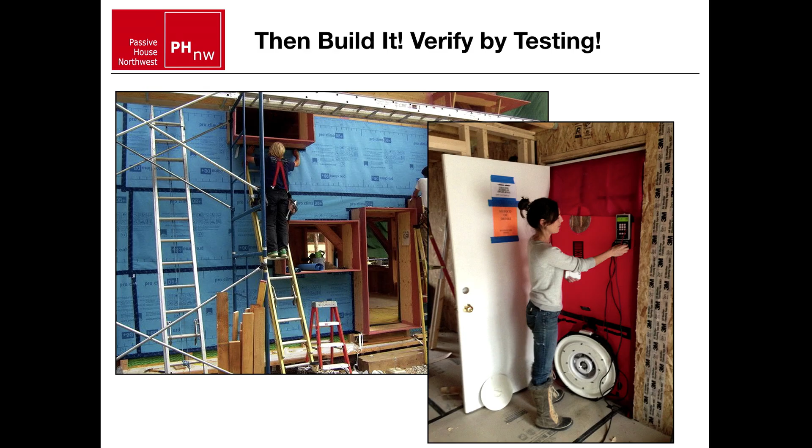These are some of the common places where you see air leakage: around doors, windows, around mechanical, electrical, plumbing penetrations into your building. We're really focused here - you can see she is doing this air barrier test well before sheetrock has gone up, hopefully before insulation has gone up, at a time when you can still go in and test for air leakage and fix those before you get to your finishes.

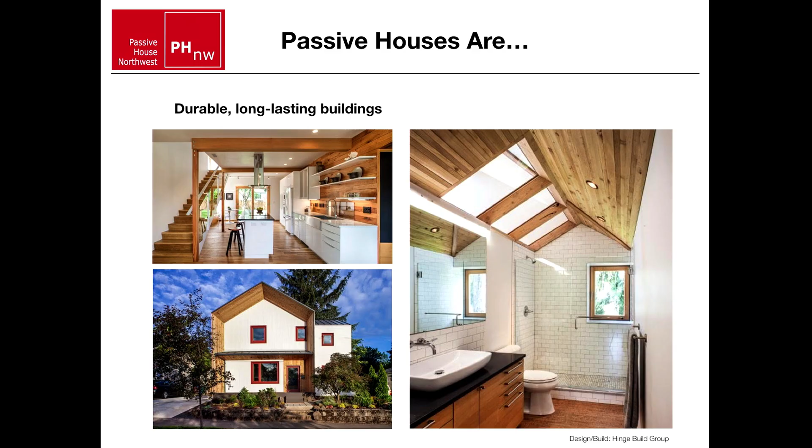Durable, long-lasting, beautiful buildings - this is a project by Scott Kosmecki of Hinge Build. This was actually a retrofit, so we can talk next a little bit about: can you retrofit an existing building to Passive House standards? The answer is yes. And how complicated is it? How much work do you need to do on the house? Can you turn an old jalopy into a fancy new vehicle? It's going to take some work.

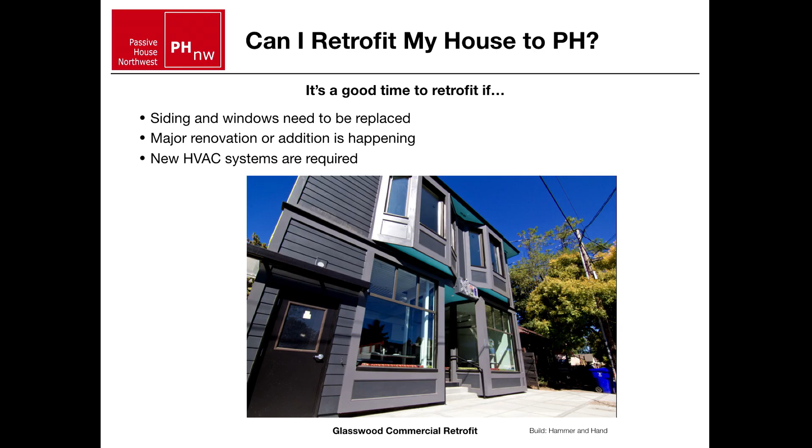You can retrofit, but you really should be taking on a building that needs a lot of work—if you need to redo siding and windows, because then you can focus on your air barrier. A major renovation or addition is a good opportunity. New HVAC systems are required because to retrofit to Passive House standard, you need a much smaller mechanical system than a typical house. You don't need that giant jet engine gas furnace because you have a more efficient house.

People always ask about cost. How much does it cost to retrofit?

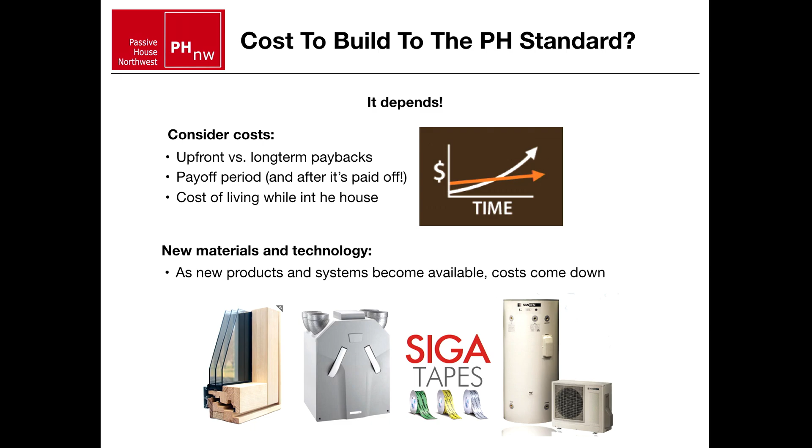Unfortunately, it just depends. It depends on how old your construction is, how much you were planning to put in. Were you already planning to re-roof your building? Were you already planning to mitigate air leakage in your crawl space or basement? One thing we don't think about very much in the United States is the upfront cost versus the payback. We often look at how much it costs up front without considering the time it may take to regain those expenses.

The exciting thing is that because we're on the forefront, we're going to see costs drop as Passive House—not necessarily Passive House standard, but high performance building strategies—are implemented worldwide. The United States is not at the forefront of this energy efficiency work, but we're now recognizing globally that it's crucial to meeting our global warming goals, like the 2030 challenge to reduce carbon emissions. In China right now, there's at least one entire city being built to Passive House standards, so we're going to see this take off quickly and reach a critical point.

How much does it cost to build to the Passive House standard? Where are you located? That depends a lot. What does your architecture look like? Are you building a custom home? Any custom home is going to be expensive. What's your trade base of knowledge?

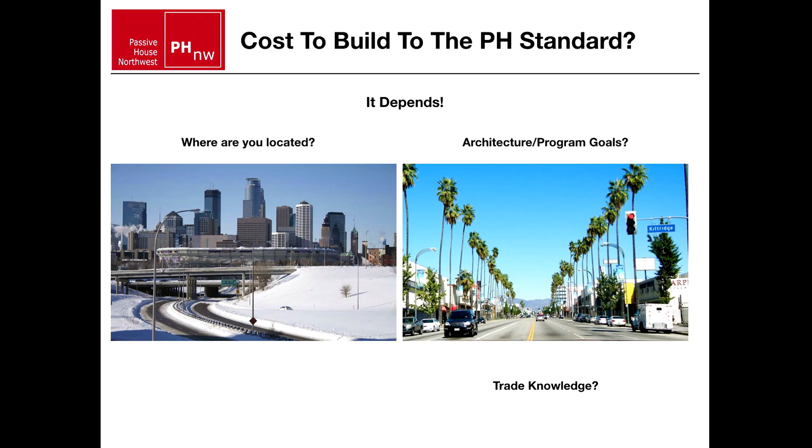We always say we have to train our trade partners and subcontractors to learn about high performance construction. Once folks are more familiar with what it takes to build to the Passive House standard, they'll start charging you less because they're not as scared of it—they become more efficient in their own systems.

How big is the building? With multifamily type construction, there's a lot less building envelope per square foot, so that proportion of your cost really drops.

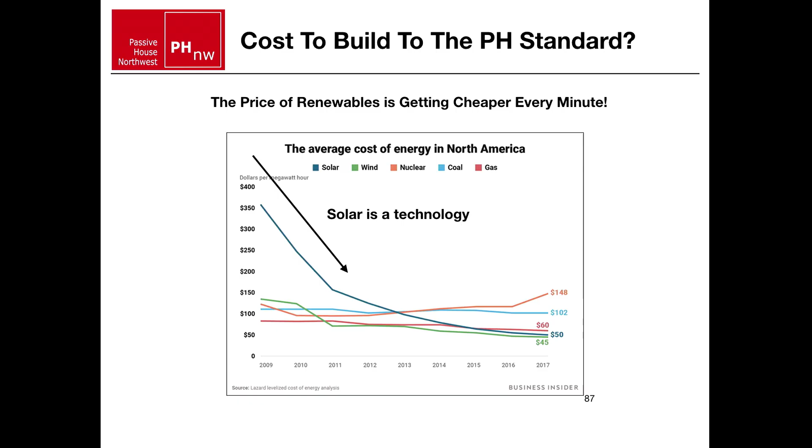This is really fun—looking at the cost of renewables over time. This slide shows 2009 to 2017, a bit outdated now. The cost of fossil fuels is just hanging out there at the bottom, not changing much. Then suddenly, here comes solar—2009, see that blue line dropping from the left, out of nowhere. That's because solar isn't a fossil fuel, it's a technology, and as technology improves, the price keeps going down. By 2017, already 3 years ago, solar was cheaper than gas, coal, and nuclear. It's exciting to see what's coming up with renewables.

One thing we mentioned at the beginning is that we have two certifying bodies. Passive House Northwest is agnostic—we think both certifying bodies do great work. They'll both get you there if your goal is net zero or net positive energy use. We often say Passive House isn't necessarily the goal in and of itself; it's just the fastest way to get to a net zero, net positive building.

We've already discussed Passive House being built in schools, dormitories, community centers. I believe there's even a police station—residential, all types of applications Passive House can be applied to. And again, Passive House buildings don't need to breathe—people do.

Here are some FAQs we get a lot, as people have to reorient their brain to this new system of thinking. Of course you can open up a door and a window. These are comfortable buildings—they function similarly to any other building you're used to.

What happens if the electricity goes out and your HVAC system isn't working? Are you going to suffocate in your house? No, because you're smart—you're going to open the door, open the window, figure that out yourself. I should also mention the HRV does allow for air transfer even if the power goes out. Even if the fan is down, there is still transfer happening.

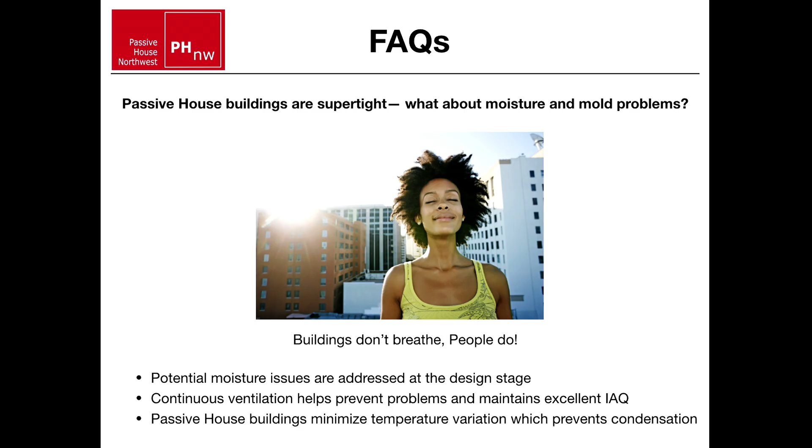One example I like to use when talking about heat transfer is if you're with your friends around a bonfire on a cold winter's evening, warming yourself at the fire, and all of a sudden somebody passes in front of you or stands in front of you, you feel the heat drop off. It's not because the air temperature in between you and the fire has decreased, it's because of radiant energy. You're no longer receiving the radiant energy from the fire.

In the same way, when you're in a building that has an even temperature all around it, you're not going to be using your heat to heat the drywall or the window or whatever it is that's sucking your energy out.

And educational resources. There's a lot going on with education in the US and in the world. Conferences, obviously. We also have a really fantastic Sustainable Homes Professional course, offered here in Portland, Oregon every year through Earth Advantage. It's a 6-month course that'll really get you up to speed on high performance construction, whether you're an engineer, architect, subcontractor, or a trade partner.